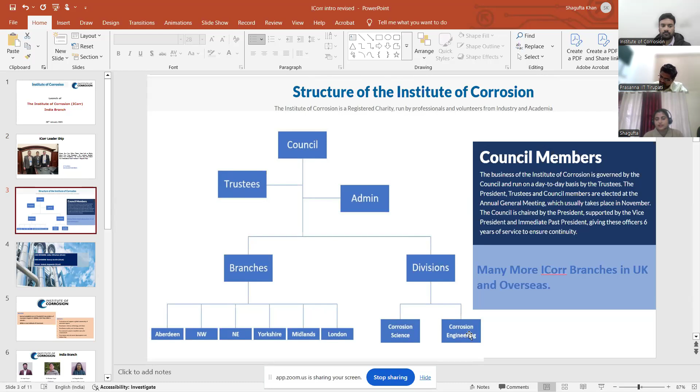Here you can see the structure of the Institute of Corrosion. The Institute of Corrosion has several branches and divisions: Corrosion Science Division and Corrosion Engineering Division. And the Institute of Corrosion has many more evenly distributed branches in the UK and overseas.

CSD, Corrosion Science Division, closely works with universities, and it organizes conferences, and it gives many awards in corrosion science and corrosion engineering. The chair of CSD is Julian Wharton, and CED, Corrosion Engineering Division, is mainly industry focused. The Institute also has Young ICORR, that is Y-ICORR. So Y-ICORR gives opportunities to young professionals for networking.

Now, history of the Institute of Corrosion. So the British Association of Corrosion Engineers was established on 21st May 1959 in London. So the British Association of Corrosion Engineers is now the Institute of Corrosion.

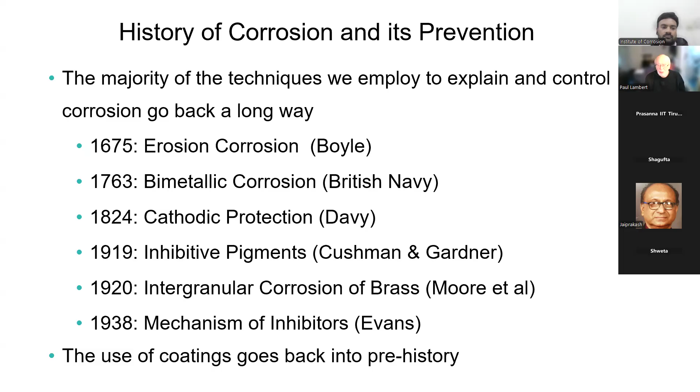That's all I'm going to say about coatings. They think they're important enough, the coatings people. We're worrying about the CP people. It tends to break into two teams.

Bimetallic corrosion, like I say, goes back a long time. You can trace a first serious awareness and a first serious scientific assessment of it to 1763 and HMS Alarm. It was basically one of the first ships that they tried out with a copper-bottomed hull. So they got copper sheeting nailed to the hull. They initially used iron nails, but very quickly realized that was a bad idea.

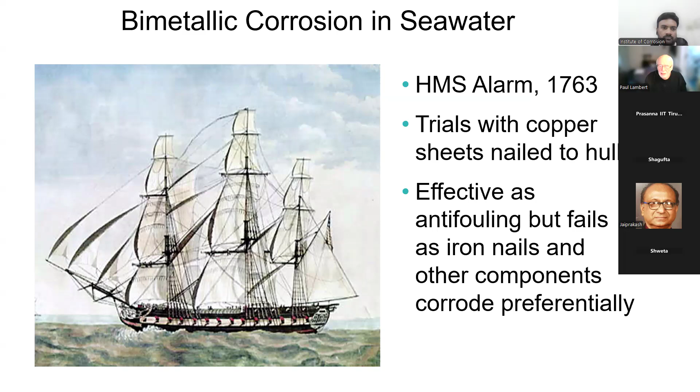As you start to understand how mixing different metals can work, you've got small areas of very corrodable metal linked electrically and in a continuous electrolyte with a huge area of a less corrodable metal, or indeed a noble metal and a base metal: the base nails and the noble copper. That comes from Humphry Davy. He first put the order in and called them base, where they were most likely to corrode, and noble, where they were least likely to corrode. But they noticed this in 1763, and very quickly observed that this was a problem.

They did some trials, and what they found was that when the copper sheets came, they came with waxed paper to protect the surface. So they would tend to just put that onto the hull of the ship, hammer it in with initially iron nails, and then tear the wax paper off. Now, where there was a little washer of wax paper that sat beneath the head, no corrosion occurred.

So they were sort of getting a hint of how you're going to deal with it. Just separating the iron head nail from the copper with some wax paper had great benefit in terms of stopping corrosion. But despite having spotted that, the conclusion from the Navy at this time was that you should never use iron in contact with seawater. Luckily, they changed their mind on that, or else one or two things would have been very different. At least the Titanic would have rotted at the bottom of the sea instead of rusting gently.

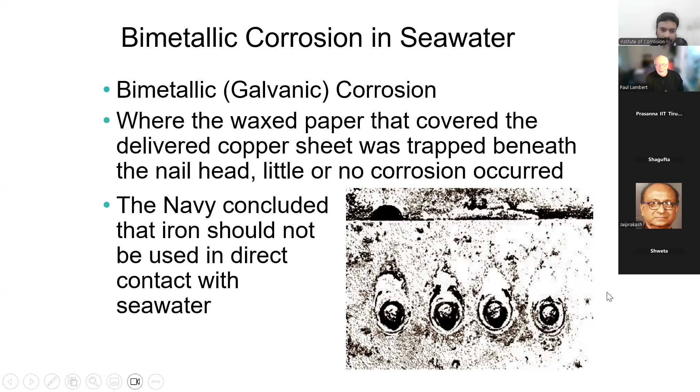But for the time being, iron, oh, forget it. Don't touch iron. Having said that, they still made mistakes. So this is in 1763. Commodore Foul Weather Jack Byron sounds like the sort of person you'd like to trust your young son with to be a cabin boy. Foul Weather Jack, yes, he sounds like a good sort. But they went around the globe as you did in those days. And his copper-bottomed ship, the HMS Dolphin, that is actually an engraving. That is supposed to be HMS Dolphin. It's landing somewhere in the South Seas. It's liberating people of anything they can load on the boat and row away with. But at

different times, different purposes. But they did report that every now and then they would hear the copper sheets on the bottom of the ship banging away because they were still using iron nails at that point. And every now and again, the rudder would drop off, which is rather nice. The rudder was covered in copper and had an iron pintle to rotate on. But because of the nature of it, the iron pintle would rot through and would fall off, and they'd have to go and make a new rudder, cover it in copper.

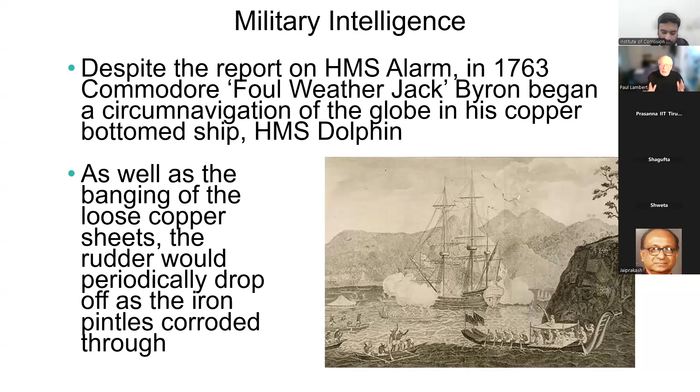Funnily enough, of course, if they'd not bothered with the copper, it would have been okay. But the copper was there for a good reason. The copper was there to stop fouling and to stop burrowing worms, particularly in warmer waters, from going into the timbers. So the copper had its purpose and had proved to be very effective in terms of making the Royal Navy faster and more reliable on the whole.

And I was fortunate enough to have a colleague who was into diving. And they went down there legally with the paperwork, I am assured, and retrieved some pieces. These are from HMS Sirius. The copper sheet you can see, if you look, you can probably see the little crow's foot mark on it, which means it was military. So that's the copper sheeting. There's one of the iron balls that the French would have been firing at the ship. Wouldn't want one of those coming at you.

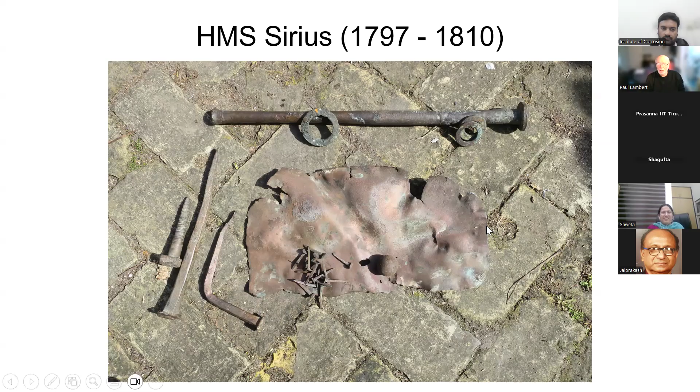In order to stop it corroding, the principle behind cathodic protection is to add a separate anode, because the mechanism is that at the anode, metal goes into solution and releases electrons. The electrons travel through the metal to the surface of the cathode. At the cathode, the electrons are combined with oxygen and water and make hydroxyl ions.

Those hydroxyl ions will eventually react with the metal ions that are in solution and make what we think of as rust. But the important thing is that the element that is the cathode in that little battery, because that's what it is, doesn't lose material. Only the anode does. And that's exactly what was being looked at.

Initially they used zinc, which continues to be popular. We now use magnesium and aluminium in different circumstances. They were also using pig iron, which is very, very rough iron, and that was working quite well as an anode for that galvanic side. Sometimes it's called sacrificial; it tends to be called galvanic now. Sacrificial has strange overtones. Galvanic is a more precise description of how it works.

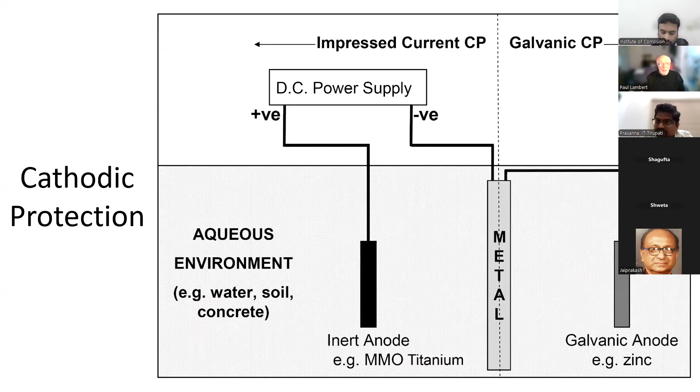The idea being that with the galvanic systems, there's less maintenance. The other way of looking at it is there's not a lot you can do once you've fitted it. It either works or it doesn't, and eventually the metal will be consumed. But more of that later.

It went off, it came back, it did what it was supposed to do. There was no weed, there were no shells, there were no barnacles. They didn't have to drag a cabin boy on a rope underneath to clean off the hull. It was perfect. The only trouble was, when you start to put the protectors on and the copper stops corroding, all of a sudden you're going to get weeds, you're going to get shells, you're going to get an awful mess on there. And the whole point of the copper was to stop those growing.

So rather than, sadly, the Royal Navy, instead of recognizing this as being a success in terms of stopping things corroding, they saw it as a failure because it prevented the copper from acting as an antifoulant. They had to eventually accept that, yeah, it's going to get consumed. So they took the protectors off. They didn't return for 100 years.

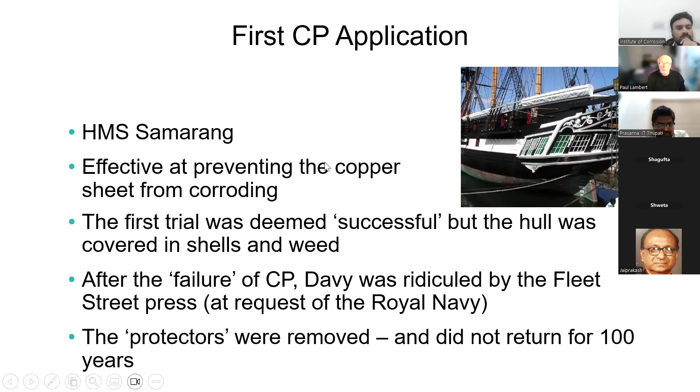They did worse, because one of the things that Humphry Davy did, or rather didn't quite do, was he discovered nitrous oxide, laughing gas, but he didn't spot the link between laughing gas and using it for operations, for medical purposes. Laughing gas to him and his friends was a recreational drug, I'm afraid.

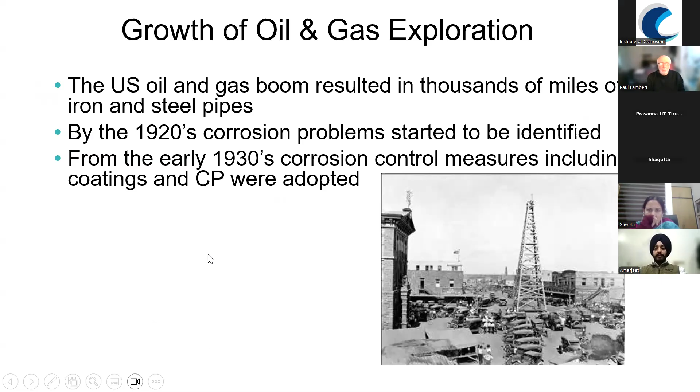There's hardly a pipeline or a ship or an oil rig or anything like that, anything that's buried or submerged, that isn't cathodically protected. You can't use it in the air, of course, unless it's in reinforcement in concrete. But basically, if you can see it, paint it. If you can't see it, CP it. That seems to cover most things.

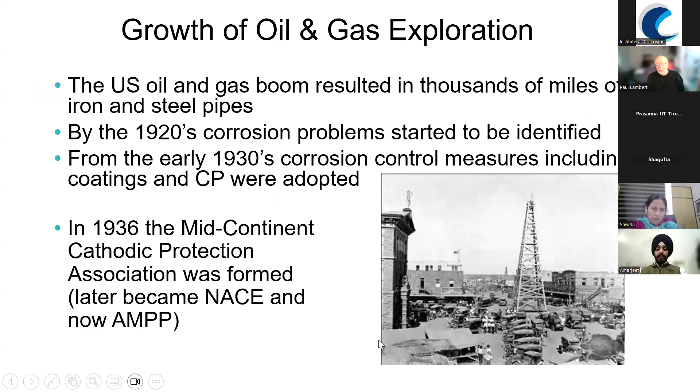In 1936, we got the Mid-Continent Cathodic Protection Association formed, which later became NACE, which I'm sure a lot of you are familiar with. And of course, NACE is now sort of becoming AMPP, but everybody remembers NACE, and it's proving to be a difficult birth, I think, moving from NACE to AMPP. But it actually started as a cathodic protection body.

I just want to show you in a little graphic cathodic protection of steel in concrete, because it works very well in concrete, because concrete's got a very nice environment in there. You've not got a free-flowing electrolyte. It's sort of held in a matrix, and that can have great benefits in terms of the effects that you get. When we're using cathodic protection with reinforced concrete, in other words, combining these two 200-year-old technologies, what do we get?

Well, I apologize for the green steel. This is what happens when you move a perfectly good graphic from one PowerPoint slide to another one. PowerPoint routinely decides that that's not a good color. But let's accept that the turquoise bar with the magenta writing is the steel, and the grey, brown, dotty stuff is the concrete.

If corrosion is starting on there, we're getting anodes and cathodes being established. The reaction at the anode is metal going into solution as an ion. So we're going to iron ions, and that involves the release of electrons. Those electrons will shoot along the metal to adjacent areas in these little batteries that corrosion is. And at the cathode we've got oxygen and water and those electrons being combined to make hydroxyl ions. No loss of metal whatsoever.

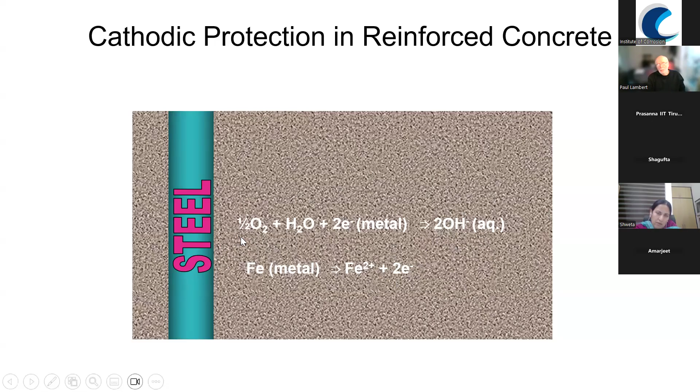Those hydroxyl ions will combine with the iron ions and eventually with more water and more oxygen and produce what we know as rust. But not necessarily where the metal is being released. The rust will go everywhere. If we put an anode, be it galvanic or impressed, onto or into this system, what we're effectively doing is swamping the anodes that already exist on the metal. And this is providing electrons to the steel.

The steel's receiving electrons, it's cathodic. If we do it right, all of the steel becomes cathodic, so that the anode reaction is switched off. We only have the cathodic reaction. Great, we stop the corrosion, splendid. But that, as they say in the best adverts, is not all.

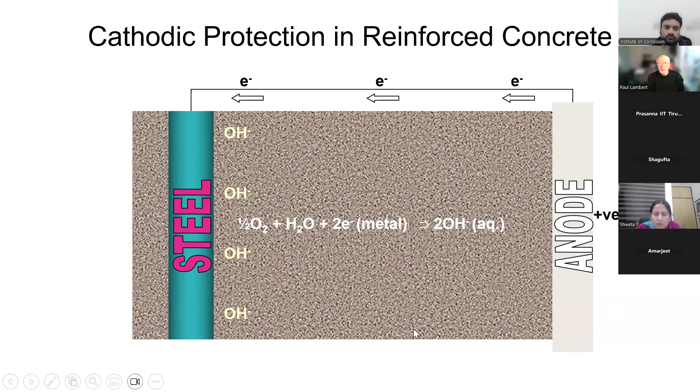We know that the main product we're going to get is hydroxyl ions. Hydroxyl ions, alkalinity. Alkalinity is actually good for steel in concrete. We like alkalinity. Great, we're producing alkalinity. Also, because the anode is positive and the steel is negative, we're going to get anything that is negatively charged driven away.

So chlorides will go away, sulfate will go away, and indeed hydroxyl ions will be pushed away. So the area around the steel will be richer in hydroxyl ions, but they will be getting distributed, and it will be low in chloride and low in sulfates. And both of those are good things in terms of maintaining the condition of the steel.

There are systems that are used specifically to increase alkalinity, sometimes called electrochemical realkalization, but you get it with cathodic protection anyhow. You can also optimize the chloride removal by electrochemical chloride extraction, but you get it with cathodic protection anyhow. The other thing that happens is in an electrical field, water moves, and it moves away from the steel. You can get systems that just do that, electroosmosis, but you get it in cathodic protection.

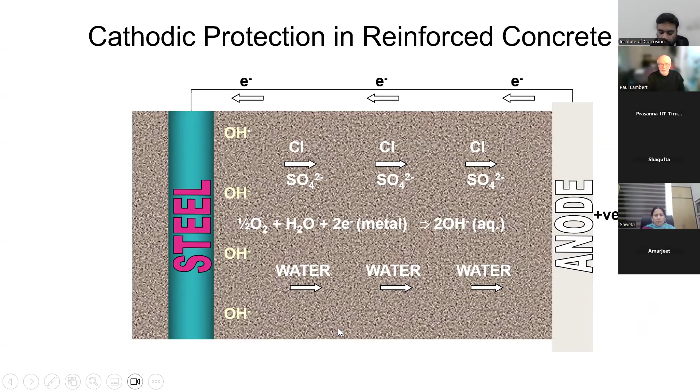So that environment, that annulus around the steel, very quickly becomes high in alkali, low in chlorides, low in water. Good conditions to maintain not only no corrosion now, but no corrosion if the system goes off for a while. So with steel and concrete, if the system goes down for a few months, frankly, it doesn't matter. It's not a matter of sending out a motorcyclist with the spare parts to repair and make sure it's working again. It's more a case of remembering to do something about it the next time you're out there. Be it 6 months or a year later, it probably doesn't matter once it's been operating for a while. As I say, it works incredibly well.

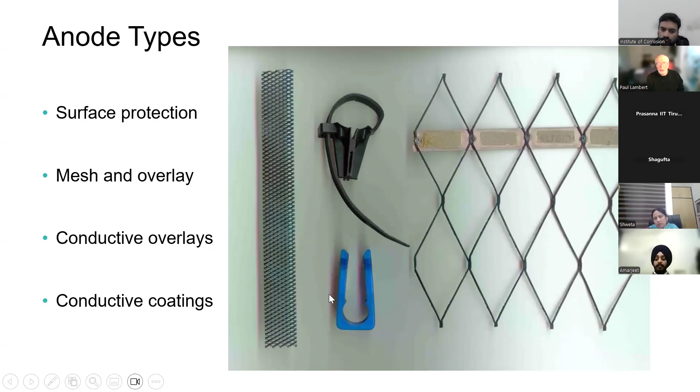Clip it directly to bars in new construction, because there is no reason on earth not to put cathodic protection in new structures. It's not done a great deal outside of perhaps places like the Middle East, where they have very saline water and it's difficult to get sand for concrete making that is free of salt. But generally speaking, they tend not to get used as much as they could be.

Other things, discrete anodes. If you can imagine, you can drill a hole and you can insert something that is also going to act as an anode. You can work in 3 dimensions. You can make them longer, deeper, more close together, further apart, and really model the current that you're distributing for optimum effect. These are just some various ones.

In terms of applying it, this is the underneath of a tunnel deck. You can see the mesh is the coated titanium mesh. The little black dots are plastic fixings that hold it in place. The dark lines you can see are ribbons that are being used to distribute the current and also boost it in certain areas. That won't work on its own.

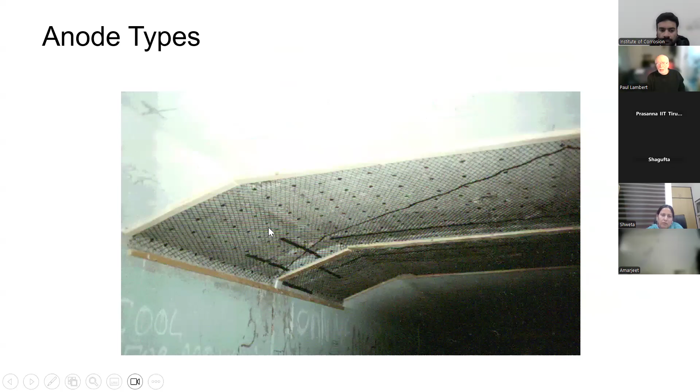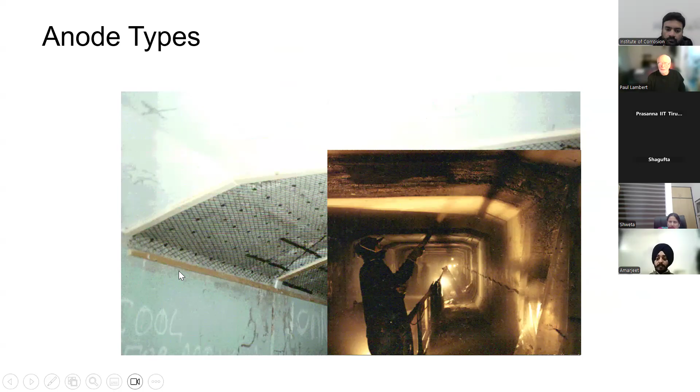It needs to be embedded in mortar, and what they tend to do there is use sprayed concrete. So it's a dry sprayed concrete. It goes over that. It protects the mesh. It acts as the electrolyte. It provides the environment in which you continue to operate. And that's proved to be a very, very effective system in infrastructure repair.

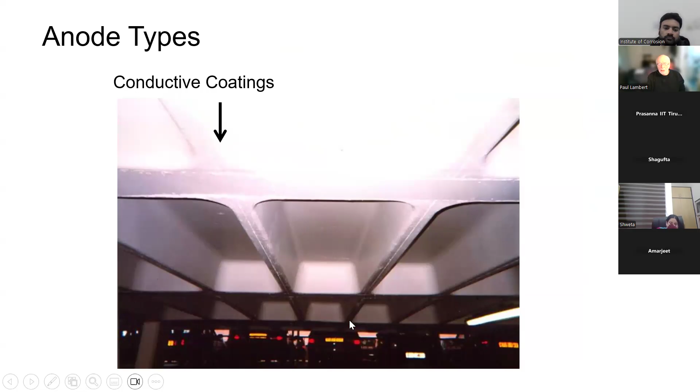On lighter structures, it's possible to use conductive coatings. This is a waffle slab in a car parking garage. It says conductive coating. You can't see the conductive coating. It's black. It's carbon based. It's painted white for obvious reasons. Not good lighting if you've got it black. Also, the coating on top protects it from moisture damage. There are wires that run along that the coating's been placed over that distribute the current.

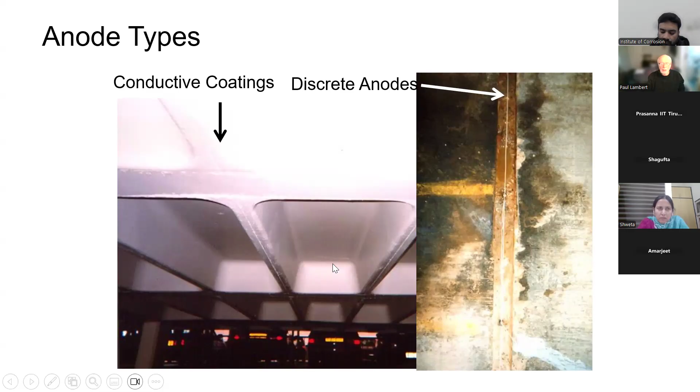And in this case, on the ribs, which have got more steel in them, from the top of the deck, we've got one, two, three anodes, discrete anodes, rod anodes drilled in and linked by titanium wires, and the whole thing made good. So that's using a different type. You can combine these as necessary to get the effect you want.

That type of discrete anode has also been very useful on historic buildings. We've got a lot of buildings from 1900, 1920, and not just in the UK, but worldwide, closer to home in your own. Some of those old colonial buildings will have been built in the same way, a steel frame with probably a Portland stone or a similar stone finish. The steel frame starts to corrode. You can strip it, treat the steel frame, put it back, but you're just resetting the clock.

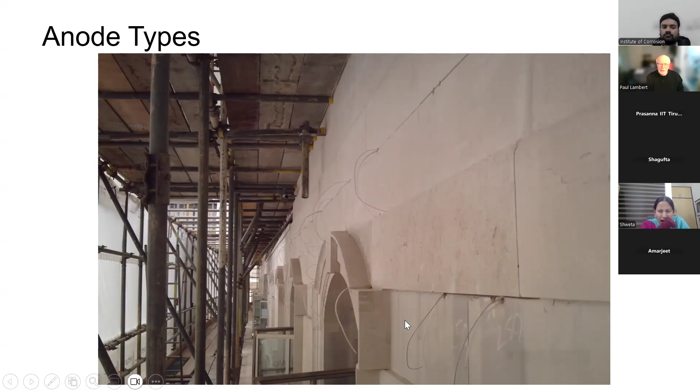If you can get anodes in there, you can cathodically protect that steel frame so it just stops corroding. That's it. And with a bit of thought and a bit of care, you can make sure all the wires are lost. You can either do it from the back, or in this case, you could do it from the front and then lose all the cabling into the joints. And you would never know it was there. There's a lot of buildings now that have got that way of protecting them.

and that's been, dearie me. Shocking. I've not been speaking enough lately, obviously.

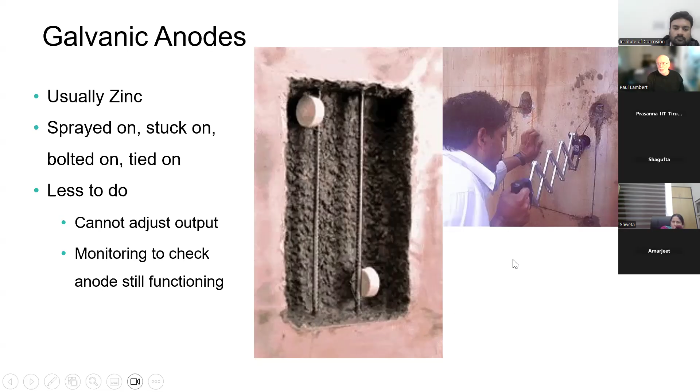But in many cases, it is a very good solution. And of course, you don't need a power supply. So in isolated small areas, it's perfect. In areas that are difficult to access or may have concerns about the power supply being interrupted, they're a good solution. And you can even get a sticky back zinc. Of course you can. I say sticky back, it's actually a hydrogel adhesive with an activator in it, something that will keep the zinc busy.

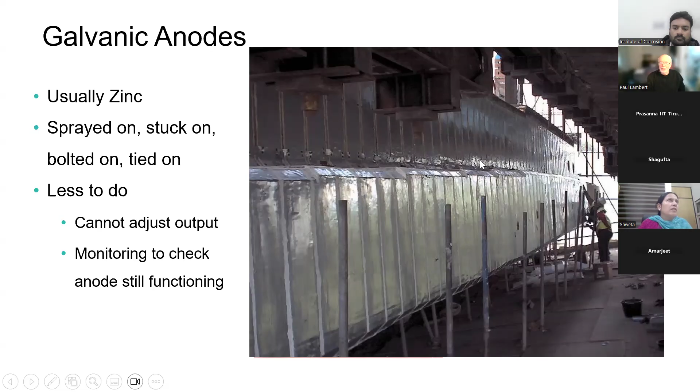You've got to make separate connections that link the zinc through to the steel. You can see these plates. I think you might be able to see a couple of plates that go through with a nail into the steel. This was on a joint where there was about a day to do something, so there's very little time to do much. Went in, threw as much of this stuff on as possible. And it's actually worked surprisingly well.

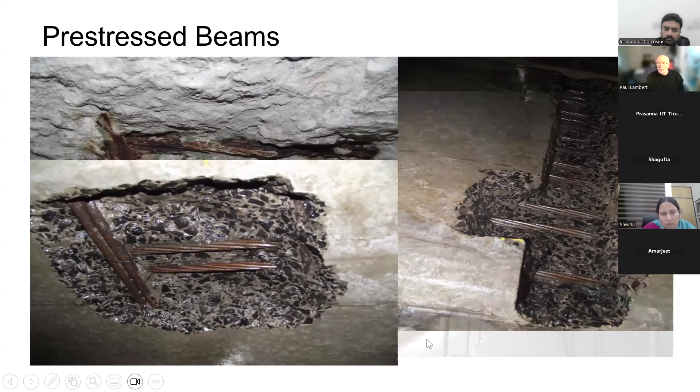Other areas where that type of system has been found to be useful is treating pre-stressed beams. Now, anybody who's done the theory on CP will say, oh, you can't use cathodic protection on pre-stressing because you get hydrogen embrittlement. Well, it's true that some steels will be susceptible, not all steels, and usually the ones in these types of pre-stressed beam structures are not susceptible. That aside, overprotection is not a good thing. It can generate hydrogen. But if you use a galvanic system, it can't overprotect sufficiently to generate the hydrogen.

So this is a very early trial. It's been going for about 20 years now, and has been widened out. You can see the connection there. The whole of this, by the way, has been coated with a cementitious coating to hide the zinc, match it in better, and also protect it from self-corrosion. Perfectly capable of using it. Sounds low tech, but when you think about it, it's real cutting edge.

But it's cutting edge of a technology that, at this stage, is already getting on for 200 years old.